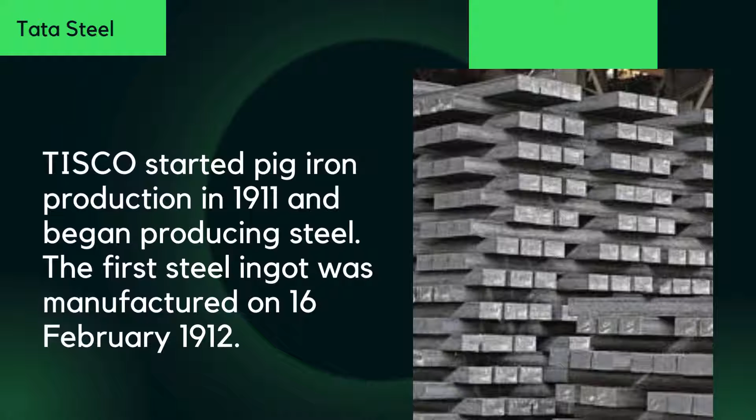Tisco started pig iron production in 1911 and began producing steel. The first steel ingot was manufactured on 16th Feb 1912. By 1939, it operated the largest steel plant in the British Empire.

The company launched a major modernization and expansion program in 1951. Later, in 1958, the program was upgraded to 2 million metric tons per annum, that is the MTPA project. By 1970, the company employed around 40,000 people at Jamshedpur and a further 20,000 in the neighboring coal mines.

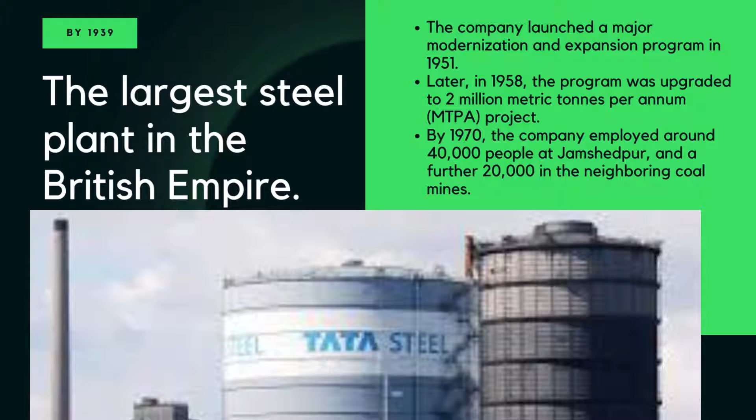There were 2 attempts, one in 1971 and another in 1979, to nationalize the company. Both were unsuccessful. In 1971, the Indira Gandhi regime tried to nationalize the company but failed. In 1979, the Janata Party regime from 1977 to 79 wanted to nationalize Tisco, now Tata Steel. Then Minister for Industries George Fernandes, at the instigation of Biju Patnaik, Minister for Steel, threatened nationalization, but due to the union's protest, the move failed.

The company changed its name from Tisco to Tata Steel Limited in 2005. Post 1990s, the company continued to regularly expand its capacity.

Jamshedpur Township: Tata Iron and Steel plant was set up at Sakchi village in Jharkhand. The village grew into a town and the railway station there was named Tata Nagar. Jamshedpur is the first planned industrial city in India and was established in 1919. Lord Chelmsford renamed the city to Jamshedpur in honor of its founder Jamshedji Tata. Tata Steel is situated in the center of the city and occupies 1/5 of the entire city area.

Tata Motors is the second major industry in the city and was opened in 1945. It is spread across an area of 822 acres in the eastern side of the city. The city was planned according to the vision of Jamshedji Tata to provide all the comforts and conveniences to the workers rather than just a mere row of hutments.

Let's have a company overview. Today, Tata Steel is one of the world's most geographically diversified steel producers. Tata Steel is headquartered in Mumbai, Maharashtra, India, and its marketing headquarters at the Tata Center in Kolkata, West Bengal. Tata Steel primarily serves customers in the automotive, construction, consumer goods, engineering, packaging, lifting and excavating, energy and power, aerospace, shipbuilding, rail, and defense and security sectors.

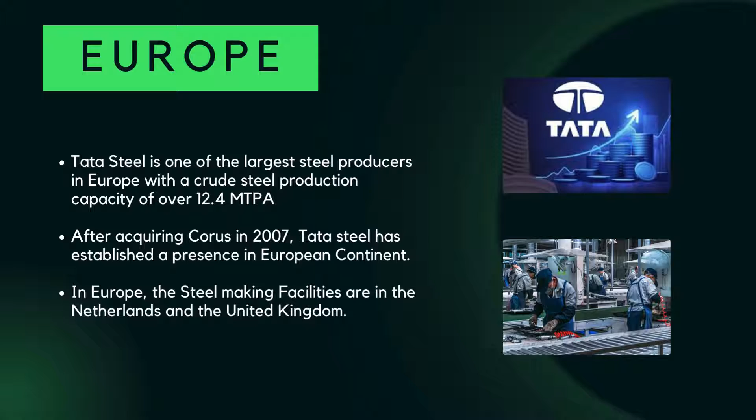Southeast Asia: Tata Steel's operations in Southeast Asia with 2.2 mtpa capacity began in 2004 with the acquisition of Nat Steel, Singapore. India continues to be the biggest market for Tata Steel. The steel demand is expected to grow rapidly in India, particularly as India transitions towards being a middle income economy. To keep pace with this expected demand growth, Tata Steel is currently doubling its Indian capacity to 40 million tons.

Expansion, mergers, and acquisitions. While Tata Steel has grown organically in India practically since its inception, particularly post 2000, it has made a few large acquisitions which have made Tata Steel a significant global player. Singapore based Nat Steel was acquired in 2004 by paying $486.4 million dollars in cash.

In 2005, Tata Steel acquired a majority stake in Thailand based steelmaker Millennium Steel for a total cost of $130 million dollars. Millennium Steel has now been renamed Tata Steel Thailand and is headquartered in Bangkok.

In 2006, Tata Steel signed a deal with the Anglo-Dutch company Corus and bought 100% of shares for $12 billion dollars after rounds of negotiations. At the time of acquisition, Corus was four times larger than Tata Steel in terms of annual steel production. Corus was the world's ninth largest producer of steel, whereas Tata Steel was at 56th position. The acquisition made Tata Steel the world's fifth largest producer of steel.

Tata Yodogawa Limited is a metal fabrication and processing company headquartered in Jamshedpur, India. It was a joint venture between Tata Steel and the Japan based Yodogawa Steels, set up in 1968.

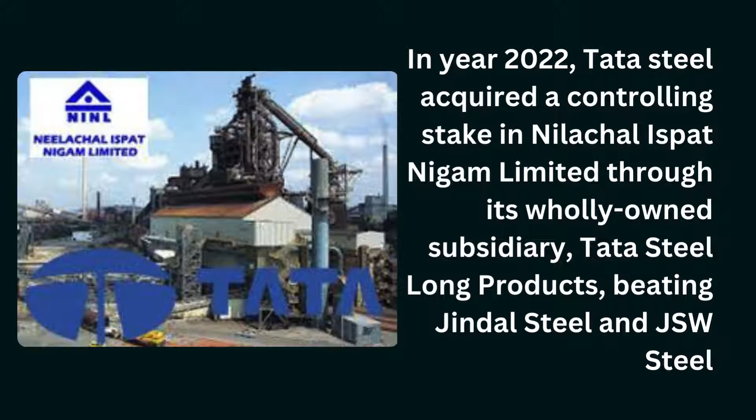In 2017 and 2018, Tata Steel acquired Bhushan Steel after intensive bidding at NCLT. Bhushan Steel, like Corus, was a primary steel producer, unlike most of the other acquisitions. In 2022, Tata Steel acquired a controlling stake in Nilachal Ispat Nigam Limited through its wholly owned subsidiary, Tata Steel Long Products, beating Jindal Steel and JSW Steel.

In 2023, Tata Steel Limited undertook several strategic mergers and acquisitions to streamline its business portfolio. These mergers, totaling a cumulative annual turnover of approximately 19,700 crore rupees in FY23, offer an opportunity for consolidation of downstream operations. They enable growth in value added segments by leveraging Tata Steel's extensive marketing and sales network. Additionally, the amalgamation drives synergies through raw material security, centralized procurement, inventory optimization, reduced logistic costs, and better facility utilization.

For three other companies - Bhubaneswar Power Private Limited, Angul Energy Limited, and Indian Steel and Wire Products Limited - the merger process is in advanced stages and is expected to be completed by Q1 of fiscal year 2025, subject to regulatory approvals. However, the merger with TRF Limited will not proceed as both companies have decided not to pursue it. Tata Steel remains committed to its simplification journey and will continue to explore relevant opportunities in the future.

Tata Steel Management Overview. Mr. Ratan Tata is the Emeritus Chairman of Tata Sons. Mr. Natarajan Chandrasekaran is the Chairman of Tata Sons Limited and a former CEO and MD of TCS.

T.V. Narendran is the Global Chief Executive Officer and Managing Director of Tata Steel Limited. He joined Tata Steel in 1988 and later became the Chief of Marketing and Sales Officer, playing a key role in building the Tata Tiscon brand and the distribution network for the same.

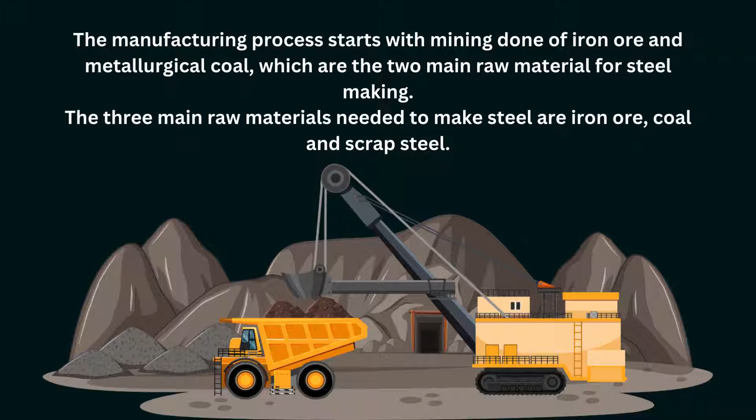Manufacturing process: The manufacturing process starts with mining of iron ore and metallurgical coal, which are the two main raw materials for steel making. The three main raw materials needed to make steel are iron ore, coal, and scrap steel.

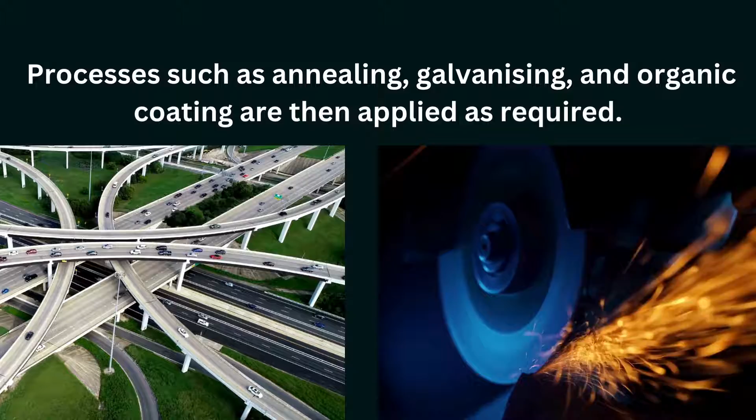Various sizes and profiles of steel products emerge from hot and cold rolling. Processes such as annealing, galvanizing, and organic coating are then applied as required. Finished steel then becomes the products that make the modern world, from cars to bridges, from ships to food packaging, and from tall buildings to washing machines.

Inbound logistics, successful commercialization of byproducts and downstream products, and outbound logistics are the key success factors in the success of a large steel producer. Tata Steel has always had strong advantages and excelled in these areas.

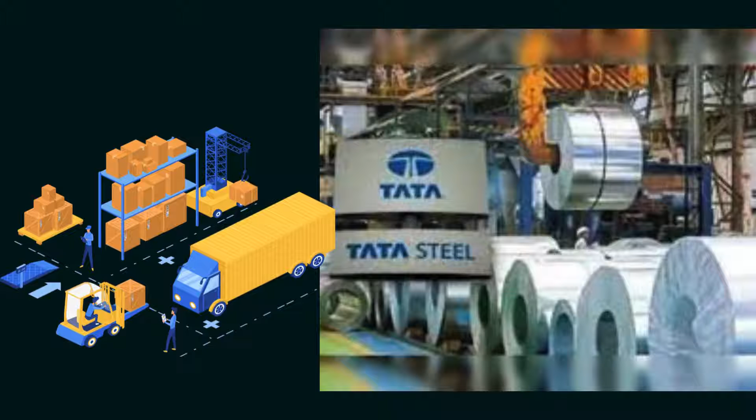The inbound logistics and raw material availability help give Tata Steel its cost leadership and a wide range of products. Its downstream processing capability gave it market leadership.

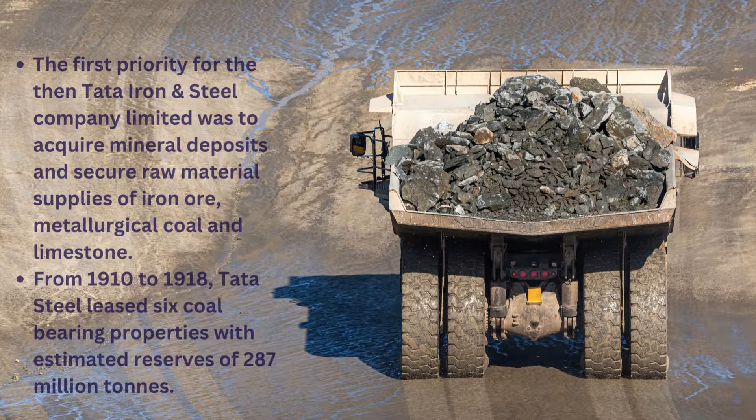The first priority for the then Tata Iron and Steel Company Limited, now Tata Steel Limited, was to acquire mineral deposits and secure raw material supplies of iron ore, metallurgical coal, and limestone. From 1910 to 1918, Tata Steel leased six coal bearing properties with estimated reserves of 287 million tons.

Currently, India is the fourth largest producer of iron ore after Australia, Brazil, and China. India is a formidable producer of some of the best iron ore.

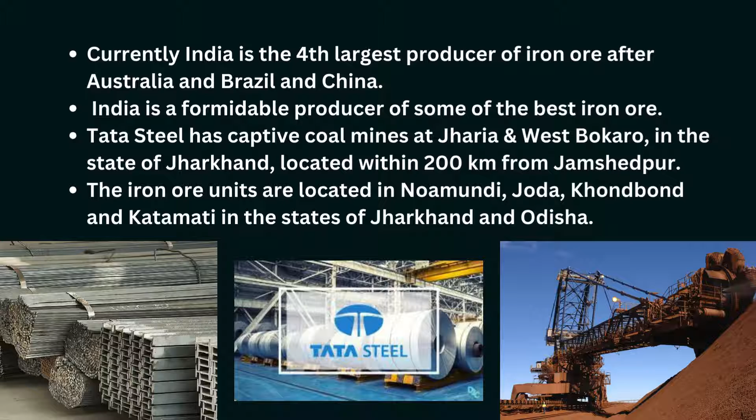Tata Steel has captive coal mines at Jharia and West Bokaro in the state of Jharkhand, located within 200 kilometers from Jamshedpur. The iron ore units are located in Noamundi, Joda, Khondbond, and Katamati in the states of Jharkhand and Odisha. The integrated steel mills have many advantages such as high productivity, cost competitiveness, and the ability to produce a wide range of high quality steel products.

However, they require large scale facility groups with complex process configurations across a large land area. The financial health of Tata Steel and its significant sized operations have allowed it to keep up with technology developments. In recent decades, it has been able to catch up in technology with its international peer group.

Challenges in manufacturing steel in India. Some of the challenges faced by the Indian steel industry are as follows: significant investments needed to set up a modern steel making plant. A 1 million ton capacity plant would require INR 8,000 crore to set up.

When the world average per capita consumption was 221.8 kgs, India's was a mere 86.7 kgs of consumption in the year 2019 and 2020. The shortage of power was a hindrance to that much needed resource in steel production.

The raw material imports from other countries are expensive, for example, the coking coal imports from Australia. There is low investment in technology. India invests much less than the world in technology, research, and development. India depends heavily on international research and technology, which comes with heavy bills and adds to the cost.

India had relatively high interest rates post independence and a severe paucity of capital. So, growing capital intensive businesses in India was relatively difficult.

Steel cycle pattern: the business of steel production goes through alternate phases of boom and bust. Steel is a cyclical industry strongly correlated to economic cycles since its key users—construction, infrastructure, automobiles, and capital goods—are heavily dependent on the state of the economy.

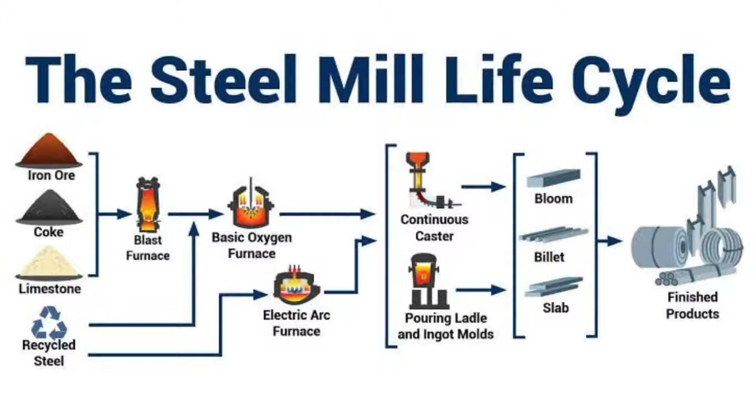During times of economic upcycle, demand for housing, automobiles, as well as infrastructure investments increases, which leads to higher demand for steel. The opposite situation prevails in downturns.

Steel projects are highly capital intensive, with around US dollars 1 billion required for setting up a greenfield capacity of 1 million metric ton. The end user industry's heavy capital investment and a gestation period of 3 to 5 years for a new plant also contributes to the cyclicity in the steel industry.

Stiff competition in the form of low cost imports puts pressures on steel prices and profit margins of industry players. The competition exists in the domestic market as well as the export market. Generally, the producers of steel products are essentially price takers in the market.

As you would see later, Tata Steel Limited has one of the highest EBITDA margins in the industry. It has also reduced its overall debt by rupees 50,000 crores in the last 2 years. This provides it sufficient resilience to withstand the down cycles in the industry.

Let's have a look at the product portfolio. Long steel products refer to steel products which include hot rolled bars, cold rolled bars, rebar, railway rails, wire, rope, woven cloth of steel wire, shapes such as U, I, or H sections, etc. These products are mainly made from billets and blooms. Long products find general use in the construction industry and in the capital goods sector.

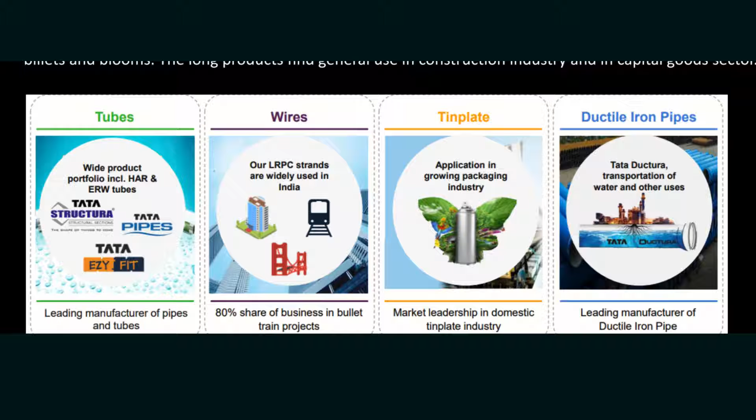Flat steel products are commonly known as steel sheet, coil, and steel plate. These products are categorized into various types, including hot rolled coil (HRC) and cold rolled coil (CRC), metallic coated steel, organic coated steel, coil plate, and reversing mill plate. Tata Steel manufactures products catering to various segments of the economy.

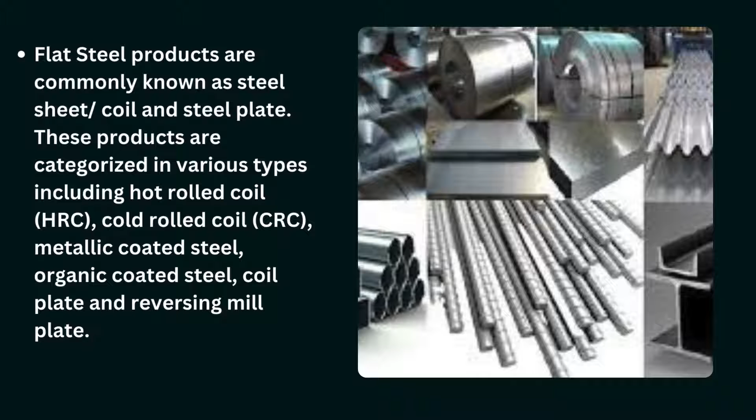In the agricultural sector, Tata Steel has Agrico, manufacturer of hoes, shovels, sickles, crowbars, pickaxes, hammers, and garden tools. Tata Pipes also caters to this segment.

In the automotive segment, Tata Steel is a major supplier for all major automotive manufacturers and ancillaries in India. The major products in this segment are hot rolled products, cold rolled products, coated products, etc.

Steel is a key ingredient in the construction and infrastructure of the economy. Tata Steel provides a comprehensive range of Tata Shakti, Tata Tiscon, Tata Pipes, Tata Structura, and Tata Vyron for the construction industry.

Tata Steel manufactures specialized steel for a wide variety of products in the consumer good industry, including domestic appliances, electronics, and furniture. Galvano, Tata Steelium, Tata Tiscon, Tata Vyron, Tata Pipes, Tata Bearings, Tata Shakti, Durashine, Tata Agrico, etc. are brands that cater majorly to this segment.

Tata Steel's product portfolio for the energy and power sector includes high quality pipeline systems, structural products, light fabricated systems, and steel components for drilling and power generation.

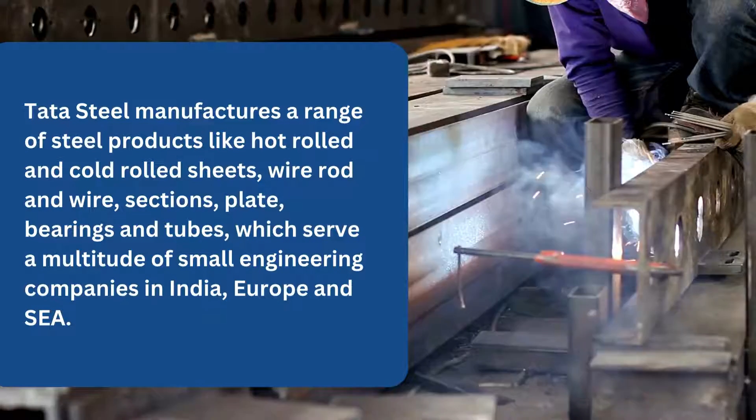Tata Steel manufactures a range of steel products like hot roll and cold roll sheets, wire rod and wire, sections, plate, bearings, and tubes, which serve a multitude of small engineering companies in India, Europe, and Southeast Asia. Tata Steel sees itself at the forefront of progressive practices.

As we have seen earlier, Tata Steel created a huge township with the intent of workers' welfare. Today, it is at the forefront of ESG practices, aiming at net zero emissions by 2045. It also aims at net zero water consumption by 2030 and is exploring various alternatives to achieve decarbonization. It follows best practices towards sustainability, biodiversity conservation, climate related disclosures, and reporting risk assessment as well. It also encourages use of its steel in clean energy.

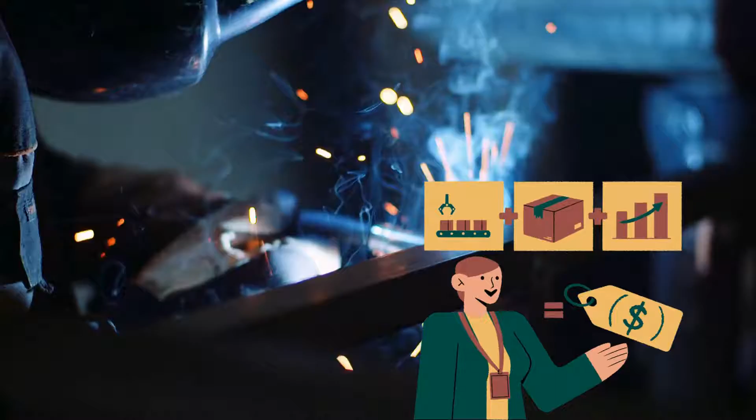Financials: The global economy, including the steel industry, faced significant volatility in 2023 due to multiple issues, including the Russia-Ukraine conflict induced global energy crisis, supply chain tightness, inflationary pressures, semiconductor shortage related issues, subsequent interest rate hikes by central banks globally, and moderated economic activity in China due to its zero COVID policy. All these together impacted the steel demand supply balance and resulted in significant contraction in steel price to raw material spreads through the year.

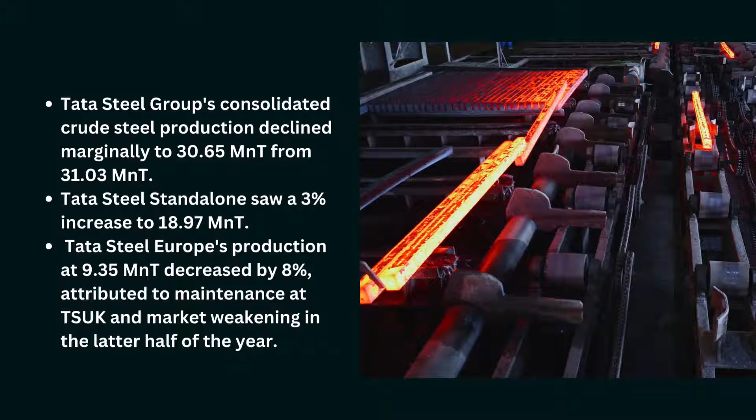Tata Steel Group's consolidated crude steel production declined marginally to 30.65 million tons from 31.03 million tons. Tata Steel standalone saw a 3% increase to 18.97 million tons. Tata Steel Europe's production at 9.35 million tons decreased by 8%, attributed to maintenance at TSUK and market weakening in the latter half of the year.

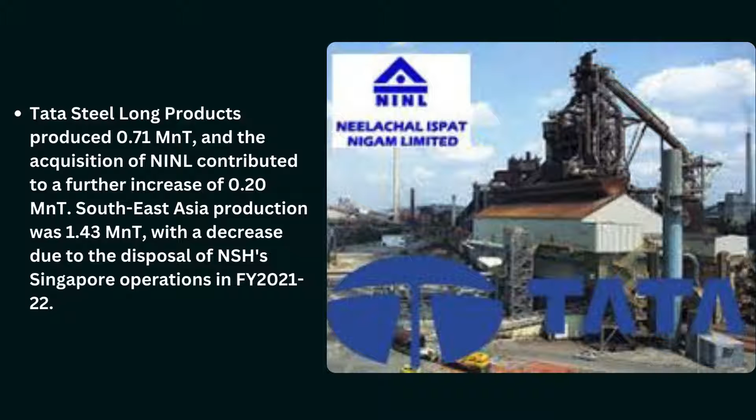Tata Steel Long Products produced 0.71 MNT, and the acquisition of NINL contributed a further increase of 0.20 MNT. Southeast Asia production was 1.43 MNT, with a decrease due to the disposal of NatSteel Holdings' Singapore operations in fiscal year 2021-22. In fiscal year 2023, Tata Steel demonstrated remarkable resilience in a challenging global business environment for the steel industry.

Despite headwinds, they achieved a record-breaking operational performance in India. Their annual production and deliveries reached an all-time high, driven by a robust marketing network and an agile business model. However, the consolidated revenue remained flat at INR

2,43,252 crore. The consolidated operating profit is 32,698 crore compared to 63,830 crore in the previous year. The reported profit after tax of the Indian operation is rupees 15,495 crore, 53% down from last year, and consolidated PAT was rupees 8,075 crore compared to rupees 41,749 crore in the previous year.

The financial performance in fiscal year 2022-23 was impacted by a higher cost structure due to elevated energy and emission related costs and raw material price volatility.

In the European business, Tata Steel recorded a revenue of rupees 90,023 crore, and EBITDA was rupees 4,632 crore. The sharp reduction in steel prices in the second half of the year, high energy costs due to the conflict in Ukraine, and above normal inflation impacted the financial performance for the year.

As of end of March 2023, Tata Steel's consolidated gross debt stood at 84,893 crore. The company has been on a debt reduction journey, slashing a whopping 50,188 crore in the last 2 years. Despite market volatility and pandemic challenges, they aim to achieve zero net debt by September 2024.

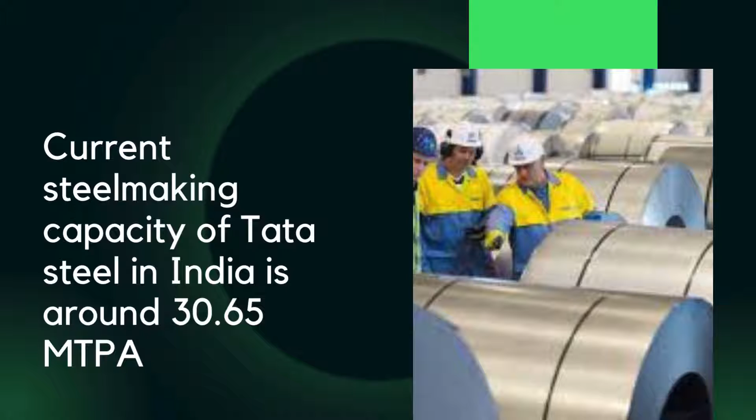Future plans and conclusion: The current steel making capacity of Tata Steel in India is around 30.65 million tons per annum, which is expected to double by the end of 2030. Tata Steel plans to invest rupees 1 lakh crore for the expansion of its steelmaking units at Angul, Kalinganagar, and Jamshedpur to achieve the target of 40 million tons per annum.

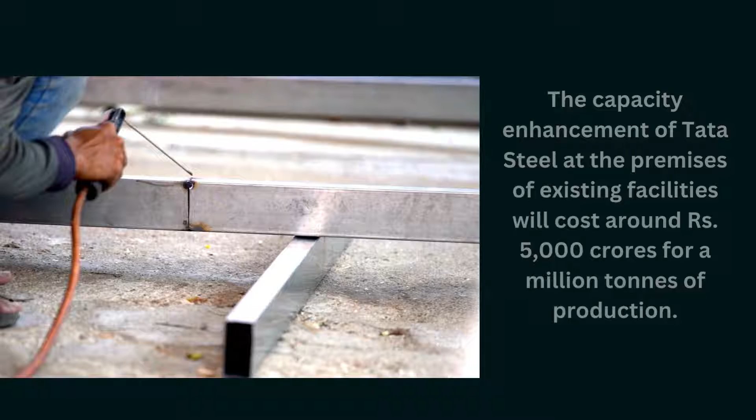The expansion of the Kalinganagar plant to 8 million tons per annum from 3 million tons per annum is now underway at a cost of around rupees 25,000 crores. The capacity enhancement of Tata Steel at the premises of existing facilities will cost around rupees 5,000 crores for a million tons of production. This is much lower than greenfield plants.

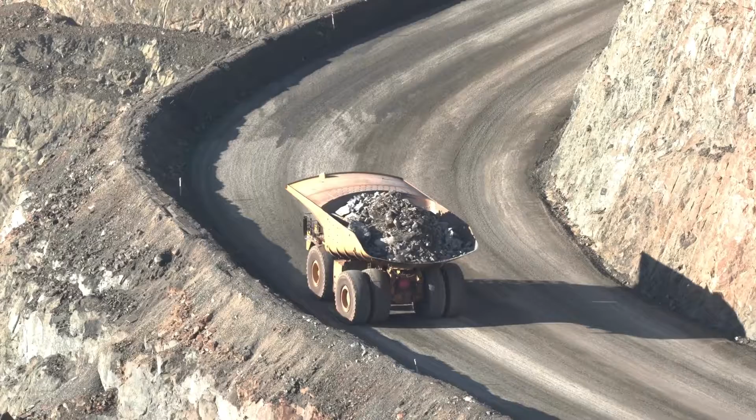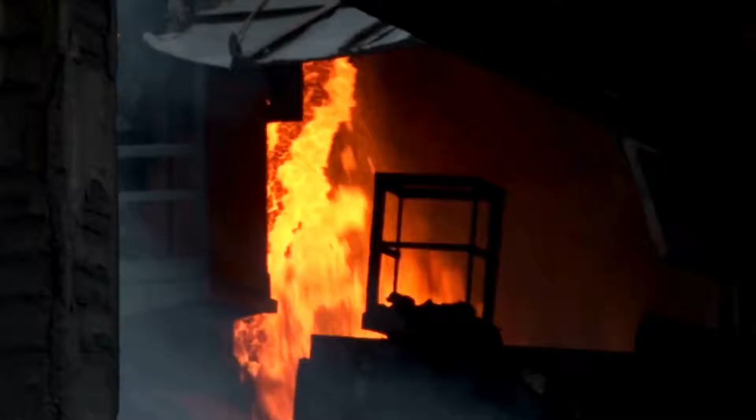Along with the expansion, the company will need to increase its production from captive mines for raw materials like iron ore and coking coal. The company produces about 25% of its required coal from captive mines, while iron ore production is fully secured. The company has planned to continue with the extraction of 25% of its own coal and import 75% of the coal. The iron ore capacity with Tata Steel is enough to cover requirements until 2030.